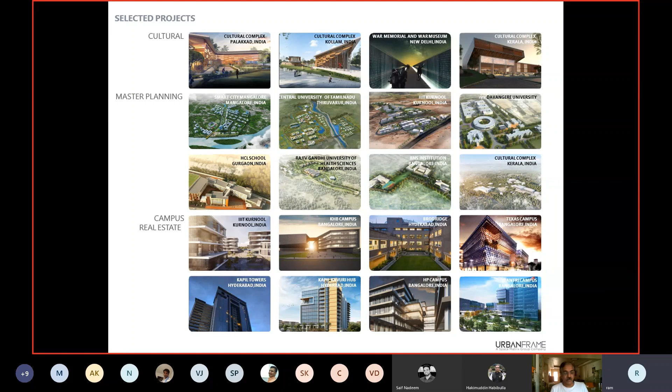I'll just take you through some snapshots of the different range of works that we do. Cultural projects in public spaces have been coming up in the last 5 to 7 years, and a lot of design aspirations are taking off, so this has been one stream in which I'm particularly involved. Master planning of universities, townships, real estate, office buildings, and hospitality will continue to do well. The baby is sports design, and it's also one of the fastest growing businesses for us. It came as a surprise when we saw the speed of the growth. Currently, we are doing projects across 15 locations in India, and that speaks to the potential or the need for sports design in the country.

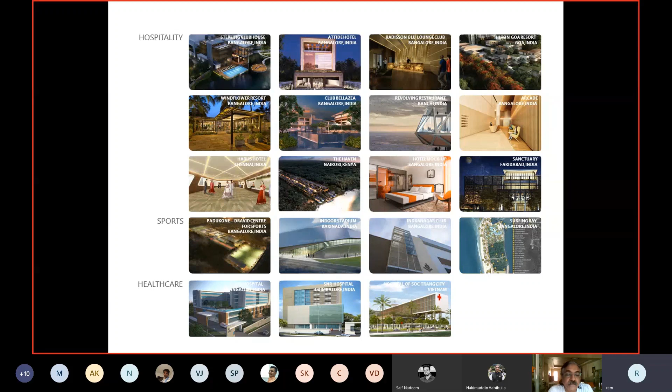The High Performance Center, I mean, the swimming pool, is part of an integrated complex. It's Padukone Dravid Center for Sports Excellence. This is very much towards the north of Bangalore, closer to the airport. It is actually a private development, which makes it very different. We could actually have a different way of approaching things. It was not funded by the government.

It was also one of the first integrated sports centers. Typically in India, you would see a center for excellence for a single sport like cricket, hockey, or football. But the vision of the promoters was to have an integrated sports center where excellence can be promoted by interdisciplinary learnings. There are a lot of gives and takes that can happen, and it's a holistic facility that caters to excellence for every sport.

So what do we have? We have cricket, football, tennis, an aquatic center, basketball, a 100-meter track. The last two, the 100-meter track and the foodbowl, are more of an amenity, recreational things. And then badminton, squash, and shooting, which we put up recently. And the cricket nets came in as a must requirement, an addition to the overall setup of the cricket.

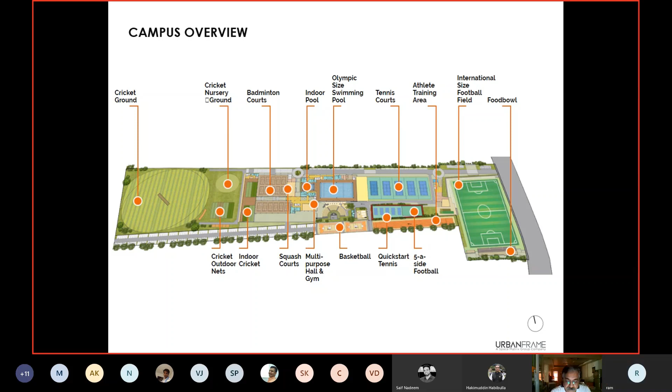I will move further from the slide to focus now purely on the aquatic center. Like each of the other sports, we began with understanding the user and then accordingly derived the program and then identified the system. An aquatic center cannot be just a rectangular box of 50 by 25. There's more to it. The heart of this aquatic center is understanding the kind of users, what their aspirations are, who the users finally are.

When we started the design process, we started with the stakeholders. We spent quite a bit of time with Nihar. We had multiple discussions and explored multiple scenarios about the kind of athletes that we have. In my discussions, one of the key things is that the athletes and the parents figured out a lot. Nihar can put in his own words what his thoughts were when we were discussing in the beginning. Nihar, would you like to jump in now?

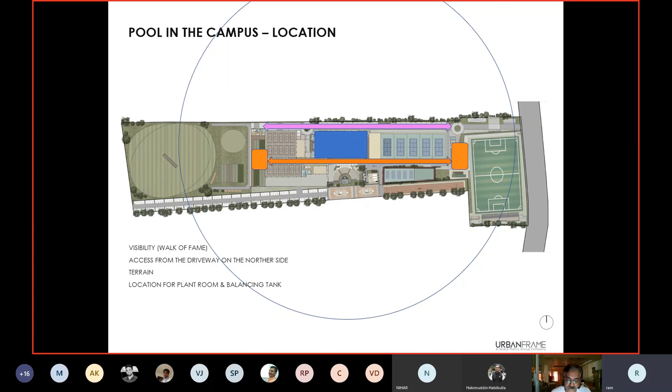I think I'll just go back here. One of the notions that typically came to my mind before I was getting into this was that swimming pool complexes are always in the corner. I've noticed this either in universities or residential blocks. They're compounded off. For some reason, it is secluded. It's not visible. You have to go finding where the swimming pool block is. So we did away with that notion.

Of course, the space was tight, but we also didn't want it to be like a compounded jail, what we normally see in municipal pools: high compound walls all around, completely locked down, you don't know where to enter, that kind of thing. So what you see, the darker box, is the indoor pool, and then the larger outdoor pool.

We set them side by side, adjacent, and then built the built mass around it in a U shape. It houses certain parts of the functional components of the swimming pool and certain parts of the leisure activities. What you see on the southern side, we intentionally left open because it's about a flow of space and also about sight lines.

I have a walk of fame which is actually moving left to right, and that particular screen was actually visible. I mean, people who are not even coming to actually train for sports, other athletes, younger athletes who are probably training in football and walking across, he or she can look into what's actually happening in the aquatic center. I think learning from each other was one thing, and making it visible was required as a part of this

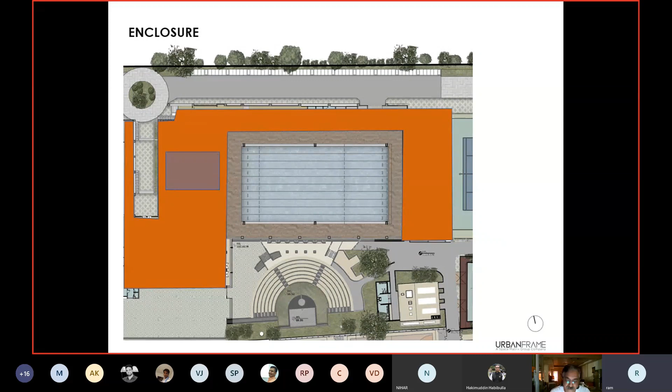learning process. I will take you through a little bit more details on this, specifically with respect to the volumetric things that actually happen around. So this is across the shorter direction. The first one, the top one, that's the 25-meter length that you see. So what we have is a lot of galleries actually on the first floor. We pushed it up. They get a better sight line into the pool.

And then not having a built component opposite to the gallery mattered a lot, because view from the gallery is also important. A lot of people will carry impressions from how they actually look at the pool. So setting that visual was very, very important. So intentionally, there's no built form put opposite to the galleries. And then we took the landform further with respect to the amphitheater and the landscape, so that the extended green can be a continuation of the blue pool.

And it's also very important. It also worked well for us with respect to handling the terrain as well. We could balance out the cut and fill well. If you look at the section on the lower part, the buildings are largely G+2. That's the east and the west. I get quite a bit of obstruction with respect to the direct sunlight, late evenings, early mornings. That's when the training is at its peak.

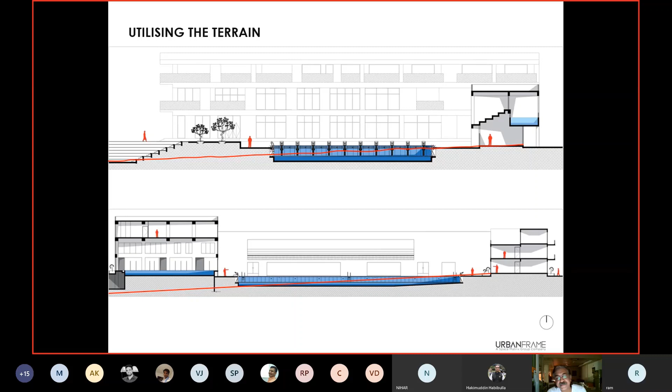Things were just setting in place with respect to locating it, getting into the depths of the pool, the adjacency, the volumetric expressions; the framework is built at this stage. And then what happens next is that typically a lot of us architects, designers, our experience of pools when we have used it in a hotel or something is that you get into the pool straight away. And change rooms are ancillary spaces.

But in this kind of a scenario, your change room is the lobby. You are entering into the change room first. That changes the way you get into the swimming pool. Your arrival point becomes a change room. So the way we look at the change room needs to be quite different. I'm not saying that it needs to be like a 5-star or anything, but of course it's a matter of choice. But the circulation is completely different.

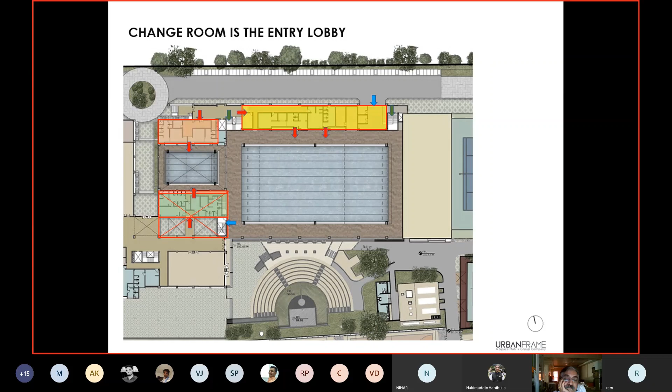We did some small innovations of understanding, and also by Nihar's experience of having seen things across the country. One thing that you will see specifically is that you'll see fewer doors. Doors, especially in the swimming pool change rooms, are actually overrated. Of course, the mindset issues are there, but if actually designed well in terms of movement, cutting off the sight lines, I think it is very much possible to cut the amount of doors.

It's not about cost saving, but it is about how convenient it is for a user and how clear the circulation can be, so that you actually put it literally in a sequence: you just have to enter the change room. You can't get into the pool straight away. You need to get into the wet area and then get into the poolside shower. This becomes very, very important.

And for privacy, we can always get in screens. Since this has already been in operation for almost two years, it works very well. Always keep the doors only for locking up the space. So our big doors are only at the main entry, at the top there, and then for the WCs. These are the only doors that we have in the change room. It works very well. I've seen it personally, things happening around in this place.

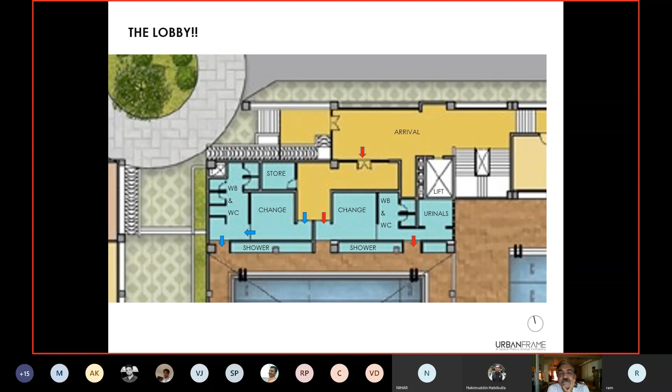What else can we look at? I think Nihar mentioned it very clearly, what happens on the deck space. I will try to put it in words, but I have seen it happening over a period of time, been there, looked at things. A lot of things actually happen on the deck space. It's usually used for training. The athletes need to do some warm-up exercises. They need to run laps across the pool. That's a part of the training module. So adequate space around the pool is for the user himself to keep running around.

The second is, if you're actually looking at hosting an event, it needs to cater to all the accessories or the smaller programs that will come in at a later stage, specifically for the events.

One thing that differentiates significantly between your leisure pool and the competition pool is the way we light the decks. We've seen beautiful images of hotels, vanishing pools. The water is lit brighter than the deck. But here it's equally important to light the deck up very well. We put in a lot of effort on how to place it, less obstruction, and things like that. Finally, we narrowed down to almost 150 to 200 lux of light level on the deck space. That actually improves the utilization rates of the pool as well.

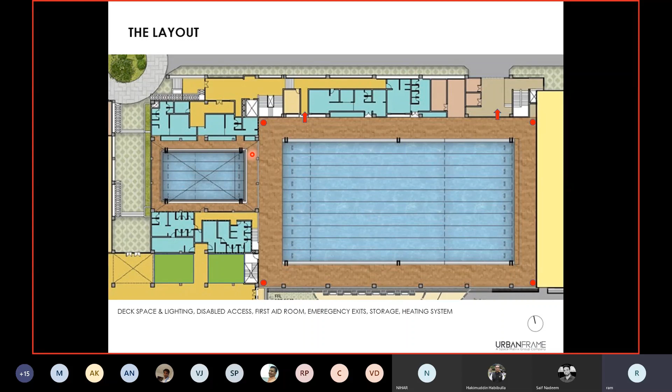If I were to do the gradient along the longer length, I would get almost 10 meters of shallow end. But by simply changing the direction, we are able to double that to 20 meters. So that worked very well. This was all inputs from Nihar, and operations-wise, it's working very, very well. A 20-meter length of a shallow end is actually quite new. I've never seen a pool being done this way.

But I think this is what happens when designers work closely with the stakeholders. We were always in constant dialogue with Nihar right from day one until it was handed over, and we still continue to talk even when it's running. I think this is what will keep bringing in innovations, new thinking that we can do.

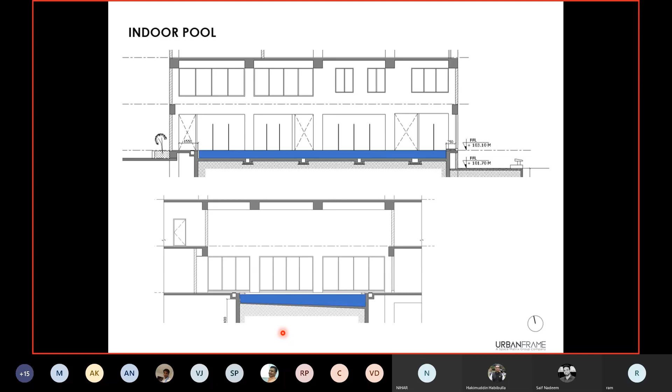Just to give you an idea of the visuals of this, this was something we worked on in terms of a few parameters: maximizing daylight into the pool. We intentionally raised the volume to handle the acoustics and the noise level. We didn't want it 100% exposed. So the top covering is always there, but on the sides, one end is open. We didn't put glass on the other side. It would otherwise lead to complications of managing the humidity levels indoors. This is a heated pool, both are heated pools by the way. So managing the humidity and things like that.

So on one end, we had it enclosed. On the other end, we kept it locked down. One end being locked down is also very important because it's on the outskirts of the city. And one of the biggest fears a user has is when the wind blows, it's quite chilling. Even when you're walking around, it's quite cold. So it is not about ventilation as such, letting the breeze blow across. That is definitely not the idea.

So we had to block wind from one direction, but at the same time get enough daylight, expose it on one side to manage the humidity, and then use the volumes to handle the sound and the acoustics part of it.

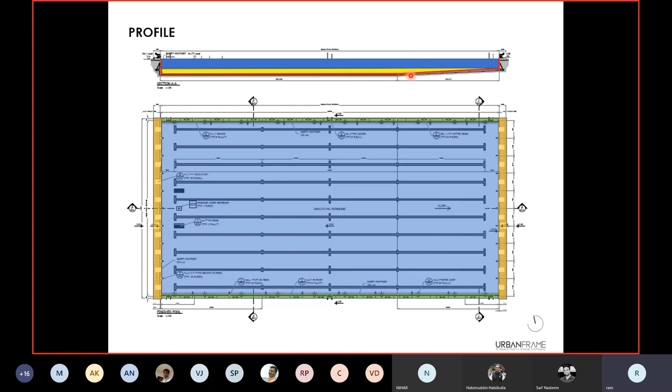We have a toe wall, which is in a profile. I'll go back quickly to the previous slide. What you see in yellow is the RCC part. That is the one which goes in a profile. That's the bottom part of the pool, upon which we have the stainless steel pool systems installed.

It's a beautiful system. I was actually pleasantly surprised that finally we have a well-engineered, well-thought-of system with respect to the construction part of it. Otherwise, we've dealt with enough issues during the construction of the RCC, the traditional pools, right? Waterproofing is not going right, tile joints are not right. If there's a leakage, you either blame the waterproofing guy or the civil work guy. This goes on and on. But it's not about the blame game. It's about once done, get it done and don't touch it again, right?

So it's a very beautiful system where we have the RCC system actually set in place, after which you have the stainless steel panel, and it has its own buttress system for support. These are bolted into the RCC pedestal. What you see here is a slight bit of toe-in. This works well when it comes to training. This is a kind of a toe hold along the edges of the swimming pool. It need not be, it's based on a user's preference whether you want it flush, but we chose that we wanted that toe hold.

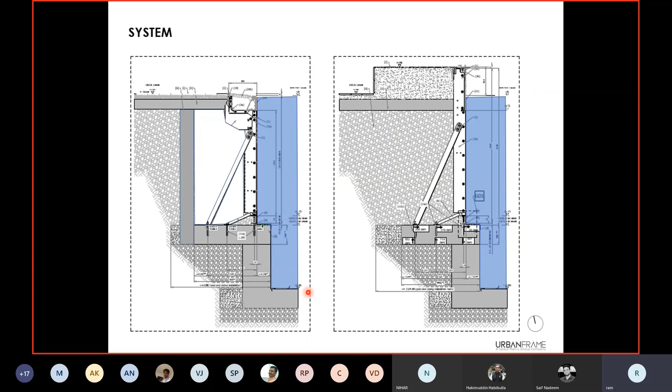And the way these panels are also assembled is that there is no welding that happens. There are none of these welding components. It's all bolted, and each of these panels is joined again by PVC, liquid PVC systems. This is what we were talking about, right? We were talking about the pool, the deck, what happens around.

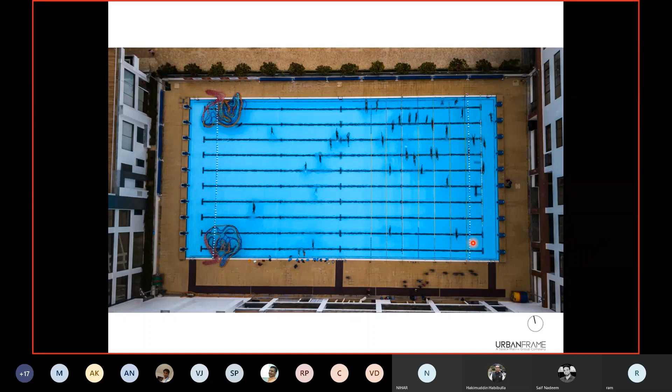This is a pool on a normal day. When we look at any training day, this is what happens. It's all set in place, quiet, until people get in. But during our discussions with Nihar right in the beginning, his aspirations for this aquatic center were much bigger, of having the ability to transform this place into hosting a significant event. Not a weekend competition or anything like that. When we're talking about competition pools, we should take into account that it is going to host a significant event down the line.

What can happen is that suddenly we are in need of additional spectator space. We had built-in galleries for a day-to-day basis. This would work well for a parent or a casual visitor who would come in. So this would work very well, and I think the deck space was managed very well, even though we would have liked to have more. But considering how we handled the change rooms and the ancillary functions around the pool, that worked well here to host an event.

Right in the beginning, we always discussed, in case of having an event, what would we do? This is what we did. This is where we put up the temporary pavilions on the other side of the pool. This is more towards the landscape. So events, transformational possibilities, are a must. This is something that I think we have addressed for every sport.

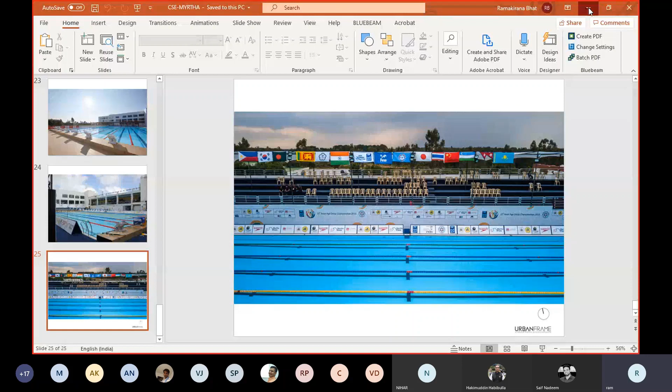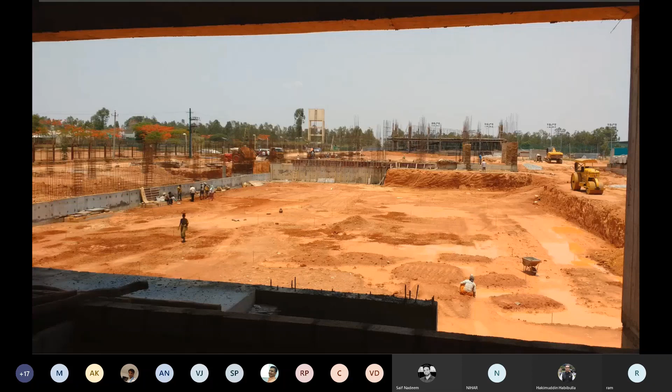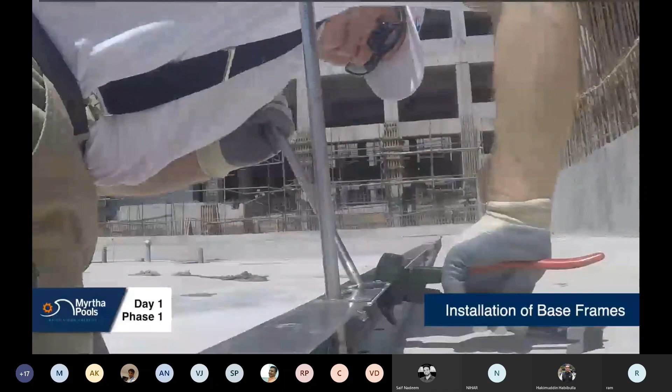So I want to run through a quick time-lapse video. I'll just put it on screen for you. So just to give context, what you would have seen initially was the base work that was done, this base civil work, on which now the Myrtha panels are being installed.

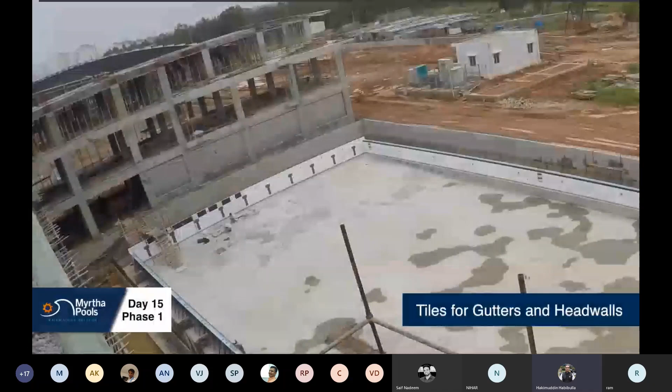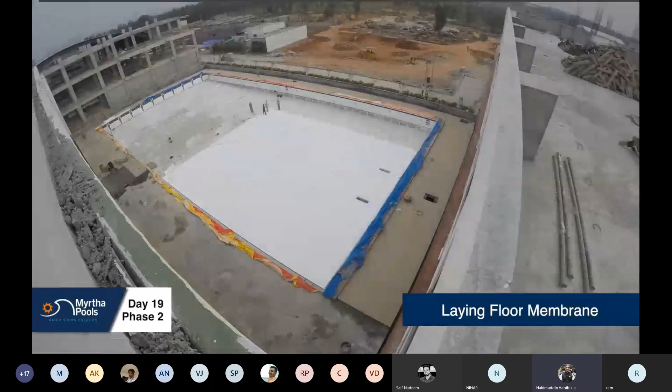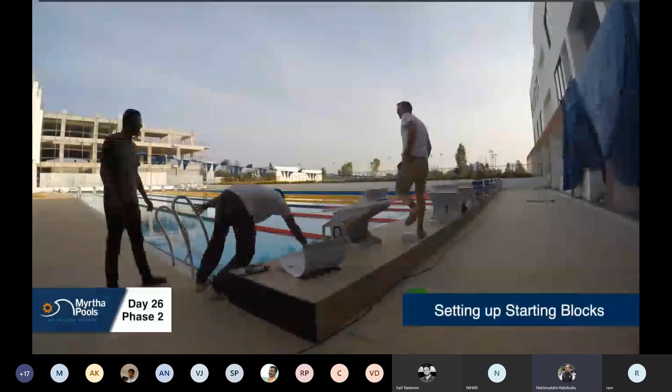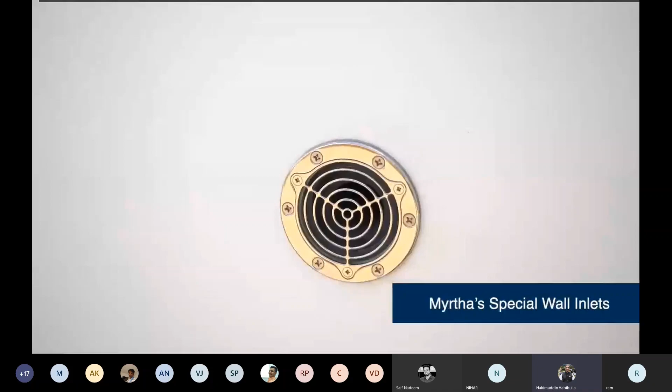So for this particular pool, we had just a few tiles on the top end, for aesthetics and to support maintenance. After the structure was put up, now you have the waterproofing layers coming in, of the special PVC membrane. You'll notice there are no tiles. The lane lines are painted with a special PVC paint, and this is the installation. So this pool has the best lane ropes, starting blocks with the backstroke ledges, the special wall inlets, recessed ladders.